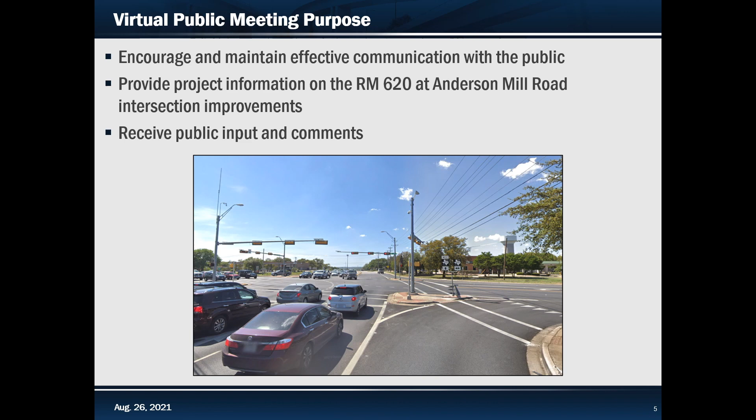The purpose of this virtual public meeting is to encourage and maintain effective communication with the public and provide project-specific information as it relates to the RM 620 at Anderson Mill Road Intersection Improvements Project in Travis and Williamson counties. Your input and comments are an important part of this process, and we encourage you to provide comments on this project. Your continued participation throughout the planning and development of this project is very important. You are encouraged to talk to your neighbors and refer them to TxDOT so they can also make comments and be included in this process.

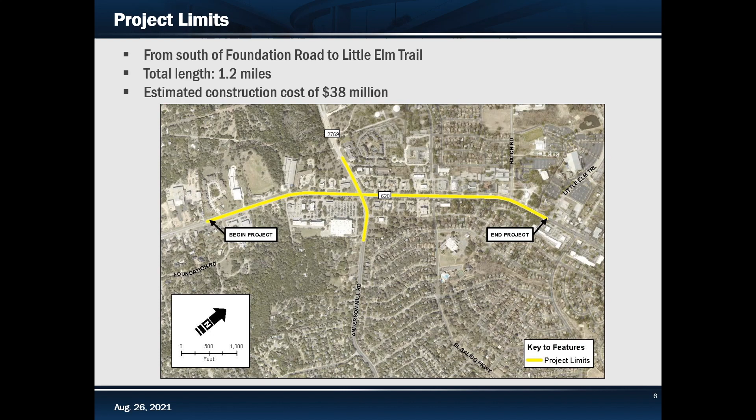The existing RM 620 is a 4-lane undivided highway with direct driveway access and signalized intersections at Anderson Mill Road and El Salido Parkway. RM 620 has two at-grade 12-foot lanes with variable shoulders in each direction, separated by a 14-foot continuous centered left turn lane. There are no bicycle or pedestrian accommodations within the corridor, and drainage is provided in open ditches.

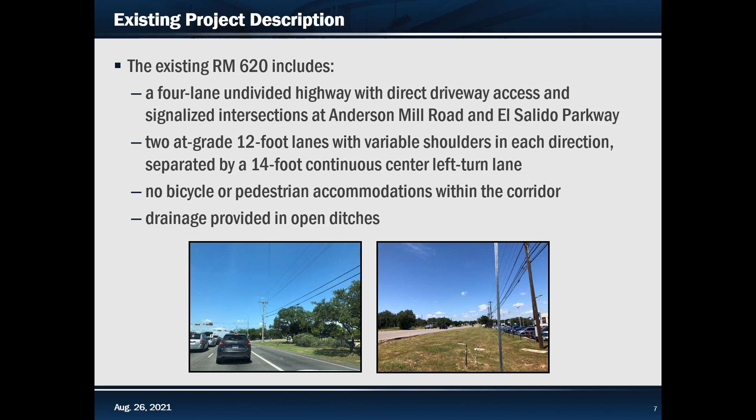The proposed project would add an elevated structure that would function as a bypass lane in each direction through the Anderson Mill Road and El Salido Parkway intersections. The proposed improvements would also include adding turnarounds at both the Anderson Mill Road and El Salido Parkway intersections. Additional right turn lanes will be added at the northbound RM 620 to eastbound Anderson Mill Road and at the eastbound Anderson Mill Road to southbound RM 620 intersections. The proposed roadway would be separated by a variable width median with curb and gutter.

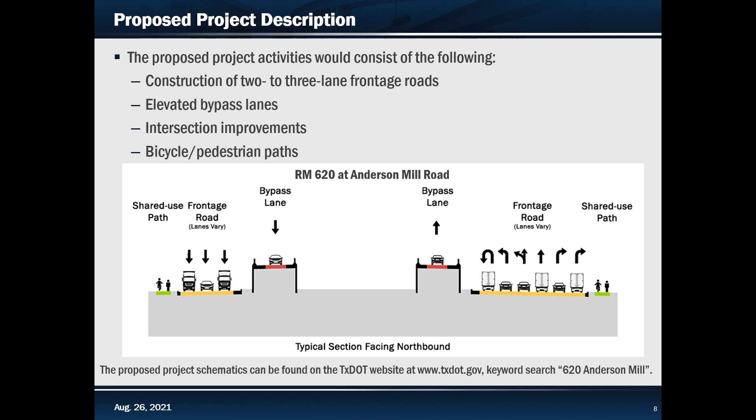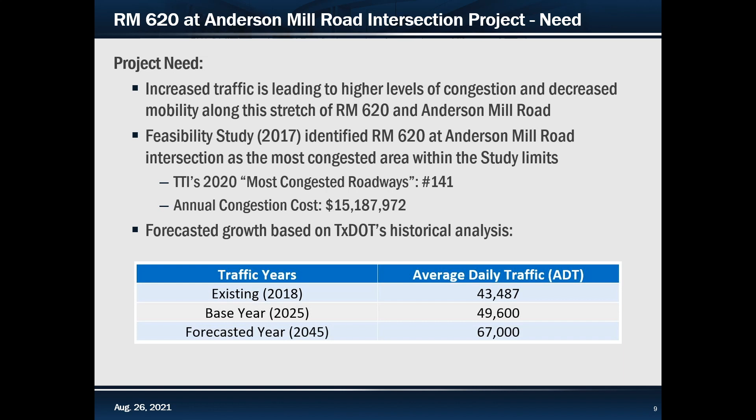As the population of the project area and surrounding region has continued to increase, so have traffic volumes and resulting congestion. In turn, mobility along this stretch of RM 620 and its intersection at Anderson Mill Road has decreased. A 2017 feasibility study identified the RM 620 at Anderson Mill Road intersection as one of the most congested areas within the RM 620 study limits, with an annual congestion cost of over $15 million. The forecasted growth based on TxDOT's historical analysis predicts the average daily traffic will increase 54% between 2018 and 2045.

This proposed project would increase capacity on frontage roads, and the construction of bypass lanes would alleviate traffic at the El Salido Parkway and Anderson Mill Road intersections. Also, this project would provide emergency vehicles a relief route through this section and reduce congestion on state roadways and local streets.

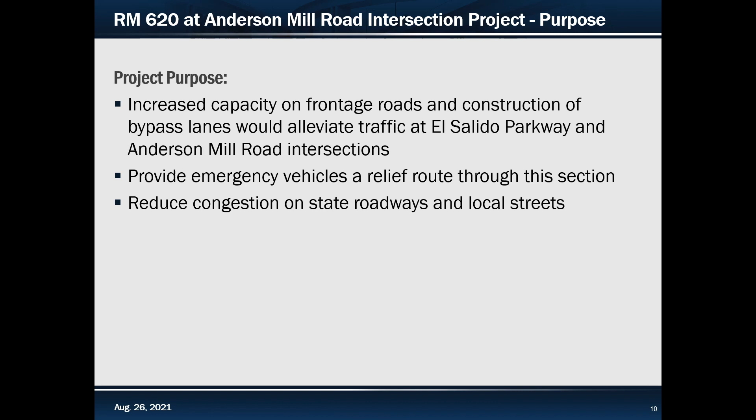Public participation is an important part of the transportation planning process. In April 2021, area stakeholders and public officials were briefed about the project. That virtual teleconference reviewed the importance of the project, as well as the lack of reliability and diminished safety of the corridor. The presentation also included an overview of the RM 620 study background, including the feasibility study completed in 2017 and a refinement study completed in 2021.

In May 2021, letters were sent directly to landowners of property located adjacent to the proposed project and that may be affected by the project, to inform landowners of the proposed improvements and to provide the opportunity to schedule a meeting directly with the TxDOT project manager and right-of-way manager. These meetings continued into August 2021.

For this virtual public meeting, elected officials and area stakeholders were notified by email and mail, and notices and letters were also sent to all adjacent landowners as identified by the Travis and Williamson County Central Appraisal Districts. Notices were also mailed to community facilities, such as schools, daycares, churches, and emergency services, and posted in local newspapers in English and Spanish.

Since the proposed project would utilize state and federal funds, it is required to adhere to NEPA. NEPA requires analysis of potential impacts to the human and natural environment as a result of the proposed project. As part of the environmental process, technical analyses are being completed to document the potential environmental impacts of the proposed project. The resource categories under study include biological resources, including threatened and endangered species and their habitats; water resources, including waters of the U.S. and wetlands; cultural resources, including historic and archaeological resources; hazardous materials; traffic noise; community resources; air quality; and parklands protected under Section 4(f) of the Department of Transportation Act.

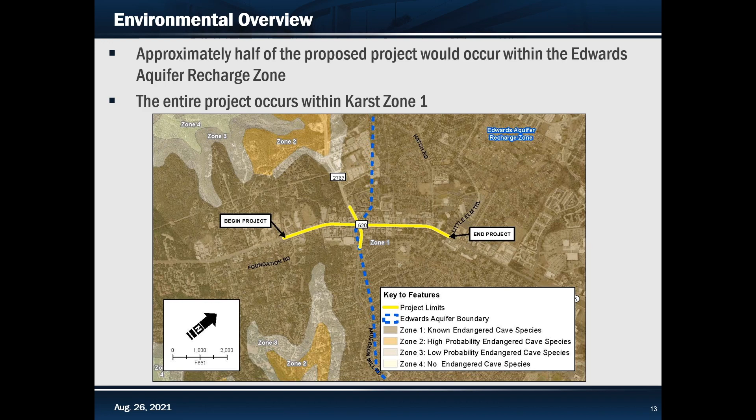The proposed project is located within an urban area comprised of high-density residential and commercial development. Vegetation communities are primarily comprised of mowed and maintained vegetation, with Ashe juniper oak and live oak woodlands. The project area contains potential habitat for federally listed species and will undergo formal consultation with the U.S. Fish and Wildlife Service. The proposed project also contains 2 wetlands and 1 small spring-fed stream, an unnamed tributary to Bull Creek. While wetlands and the stream occur within the proposed right-of-way near the southeastern project limits, these features would be avoided during construction activities and therefore would not be impacted by the proposed project.

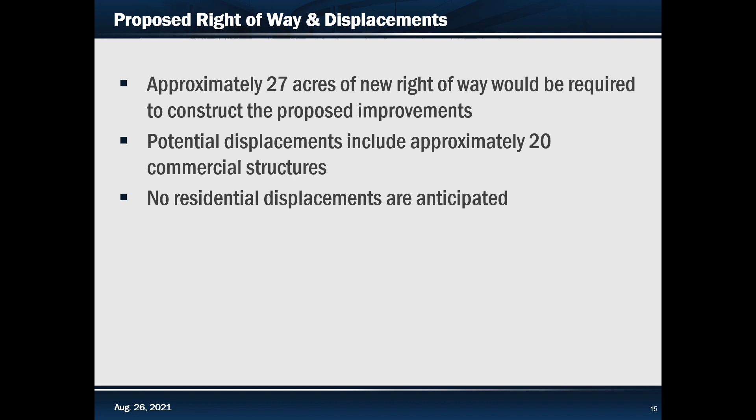The proposed project would require approximately 27 acres of new right-of-way. Potential displacements include approximately 20 commercial structures. No residential displacements are anticipated as a result of the proposed improvements.

Once environmental clearance has been obtained and the project has been fully authorized, TxDOT would commence the acquisition process. All right-of-way acquisition would be done in accordance with the Uniform Relocation Assistance and Real Property Acquisition Policies Act of 1970, commonly referred to as the Uniform Act.

In all cases, the property owner would be reimbursed for any reasonable incidental expenses necessarily incurred in transferring title to the acquired property to the state. If you have questions about right-of-way acquisition, please call the TxDOT Austin District Office at

512-832-7000. The RM 620 and Anderson Mill Road intersection project timeline is contingent on funding, right-of-way acquisition, and utility relocation, and as such, dates are subject to change. The proposed project does not currently have construction funding, but TxDOT is actively seeking funds to advance the improvements.

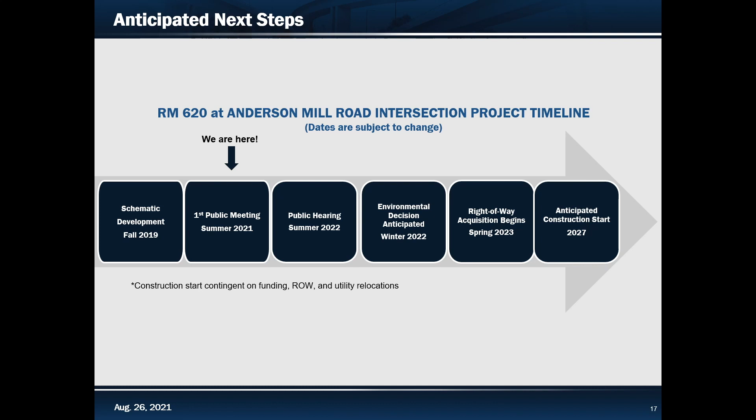This timeline shows where we are in the overall project process. The schematic development began in fall 2019. This virtual public meeting will be followed by completion of the schematic design in the fall of this year. A public hearing for the project is planned for summer 2022, and an environmental decision is expected in winter 2022. Following completion of the environmental process, TxDOT will begin the acquisition process by spring 2023. The project could begin construction as soon as 2027.

Written comments from the public regarding the proposed project are requested and may be submitted directly online on the virtual public meeting website. You can also submit comments by email or mail by filling out a comment card available on the project website. The project website can be found at www.txdot.gov and by using keyword search 620 Anderson Mill.

Thank you for your participation in the RM 620 at Anderson Mill Road Intersection Improvements virtual public meeting. Please remember to submit your comments by Friday, September 10, 2021.